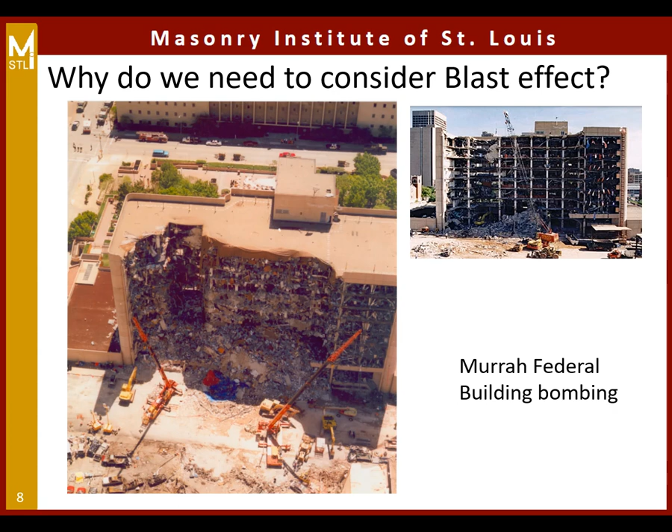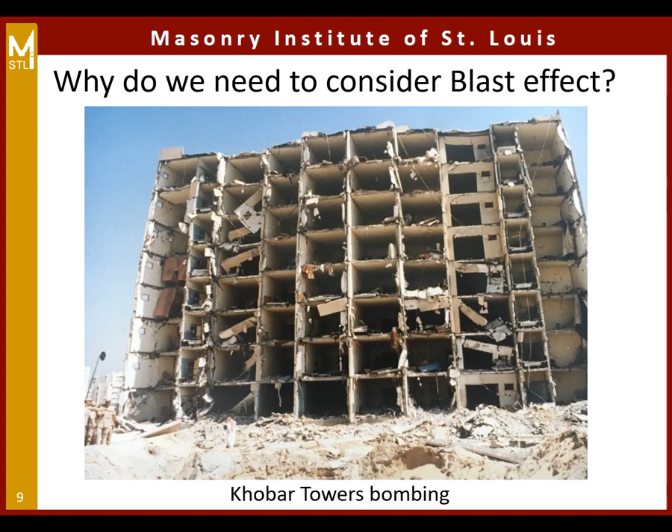It's unfortunate that it took lives, and about 19 American airmen were killed in this event, and almost 500 people were injured and wounded, mostly foreign nationals and Saudis. So those events, even though there were other events around the world targeting US territories and facilities, the federal government started to take a dive on the requirements that we currently have or what we had at that time.

Basically, what this new directive did is it established new policies, responsibilities for military construction programs. We're just going to call them MILCON for the sake of this presentation. And it delegated statutory authorities and responsibilities related to MILCON. It reissued, renamed the previous directive that became obsolete, and it consolidated information previously contained in other directives.

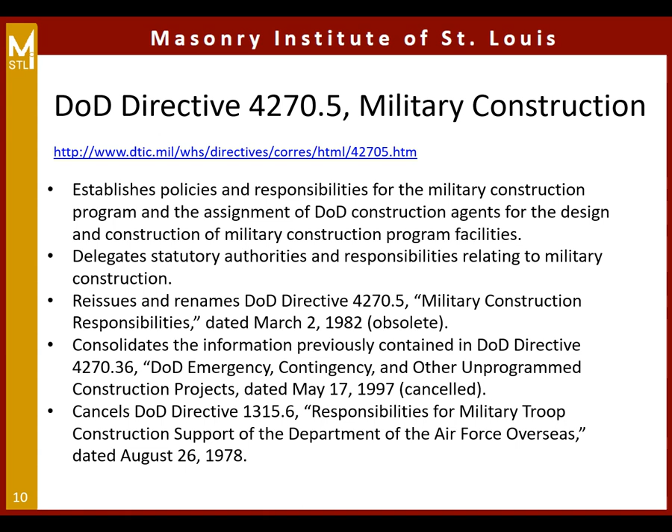And it canceled the 1315.6 directive. You can see that those previous directives, some of them are for like the Air Force overseas and for DoD emergency contingency and other unprogrammed items. So they tried to combine all of those things and make it more clear on the new requirements that we need to design for. Again, this is something that the DoD started to focus on after those frequent bombing incidents targeting US territories and facilities around the world.

The Unified Facilities Criteria, what you see here on the screen, we call them the UFCs. This reference came about after the DoD effort and the Directive 4270.5. This is the DoD minimum anti-terrorism standard for buildings. The UFCs are prescribed by MIL standard 3007. They provide planning, design, construction, sustainment, restoration, modernization, anything that is applicable to the military departments, defense agencies, DoD field activities. All of these will be in accordance with DoD Directive 4270.5 military construction.

There is a website on the screen. This is the WBDG website. If you go under that website, you can download all of the UFCs. There are multiple of them, and we pretty much have a UFC for everything related to design and construction for military construction. So you need to be familiar with it if you are doing federal and government projects.

The preparing authority for the publications, the UFCs, is the U.S. Army Corps of Engineers. They are the preparing activity, of which I work for one of their districts. There are multiple districts for the U.S. Army Corps of Engineers. I work for the Kansas City District. The Naval Facility Engineering Command is another preparing authority, NAVFAC, and AFCEC, the Air Force Civil Engineer Center. All three agencies jointly come up with all of the updates to the UFCs.

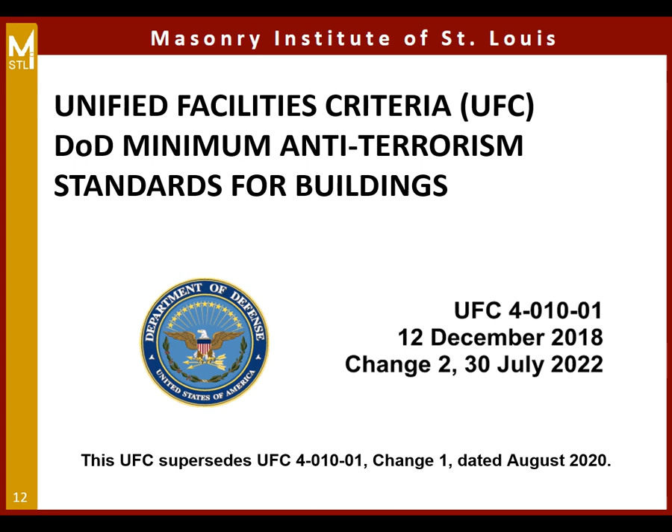When you go into the UFCs, you're going to see that the change number is actually noted, so it's easier to track what changes took place. So you'll see a forward slash and then the number 1, that's change 1, or a forward slash with the number 2, that's change 2. So we're constantly changing, revising, implementing new information into the standards.

The UFCs are effective upon issuance, so you're not necessarily going to get a notice, but once they are issued and posted on the Whole Building Design Guide website, they are enforceable. Now, I call them codes because your structural engineer will probably have to list the number of codes that he's using for the building design.

So question, how many architects in-house? Can you raise your hand? Okay, good, because this is an architectural series seminar.

So we're not going to focus much on the math behind the blast, but again, this is an overview of all of the requirements that came out of that directive 4270.5 and the DoD Minimum Anti-Terrorism Standard for buildings.

The UFCs will be used for all DoD projects, and they work for other customers where appropriate. That includes all construction outside of the United States as well. So Change 2 for the UFC added the United States and its territories and possessions.

Now, there are other publications that govern the design if you're doing OCONUS projects. OCONUS is outside the continental United States. That could be the Status of Forces Agreement (SOFA), the Host Nation Funded Construction Agreement (HNFA), and in some instances a Bilateral Infrastructure Agreement (BIA). So you're going to have to be in compliance with all four references - the UFC, the SOFA, the HNFA, and the BIA - if you're doing work outside of the continental United States.

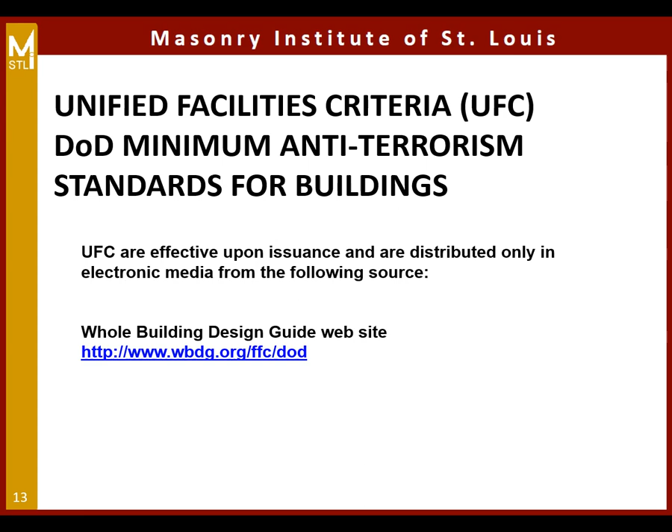So back to the Khobar bombing that I showed you in the second picture in Saudi Arabia. One of the findings in 1996 - and that took place in 1996 - in the Downing Commission report on the Khobar Towers bombing in Saudi Arabia, was that there were no standards for force protection in fixed DoD facilities, meaning we didn't really have a baseline to design and be uniform from a force protection standpoint. So the initial version of the DoD Minimum Anti-Terrorism Standard was published as an interim in 1999.

Keep in mind the three major incidents: the 1993 World Trade Center bombing, the 1995 Oklahoma City Federal Building bombing, and the Khobar Towers in 1996. It took 3 years to issue an interim version in 1999, and we finally enforced it as law in 2002. Fiscal year 2002 programs were all abiding by the DoD Minimum Anti-Terrorism Standards for Buildings.

Now, why we do what we do - it's a little different than commercial work. When you're designing a building in the private sector or commercial, you're conscious about the cost. Economy is a big deal - the budget, the construction cost. But what this standard is doing is trying to establish a minimum engineering standard that incorporates anti-terrorism based mitigating measures with no identified threat.

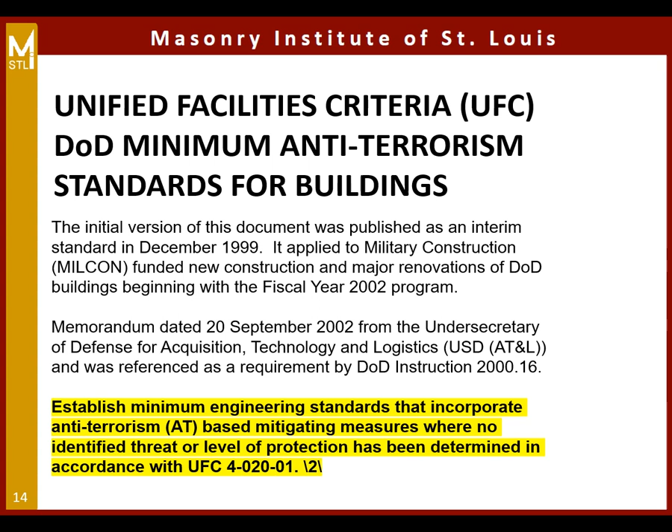Again, the intent of those standards is to reduce collateral damage - and we've seen a lot of those in recent years - and also reduce the scope and severity of mass casualties in the event of a terrorist attack. If you apply those standards, you will probably provide a cost-effective, implementable, and enforceable construction standard to protect personnel against terrorist attack.

Now, this is not like an open checkbook - the DoD doesn't have an open checkbook. We understand that complete protection against all potential threats for every inhabited building - and there are a lot of buildings owned by the Department of Defense - is cost prohibitive. But the intent of those standards can be achieved through prudent master planning.

So we can apply a few things as we're designing our facilities: master planning, real estate acquisition, and design and construction practices.

Now there is an exemption in the standard: standalone parking garages. A standalone parking garage is exempt from those standards. However, if you have a parking garage underneath an inhabited building with occupants above, the standard applies. If you have a parking garage on the rooftop of a building that is also inhabited, the standard will apply as well.

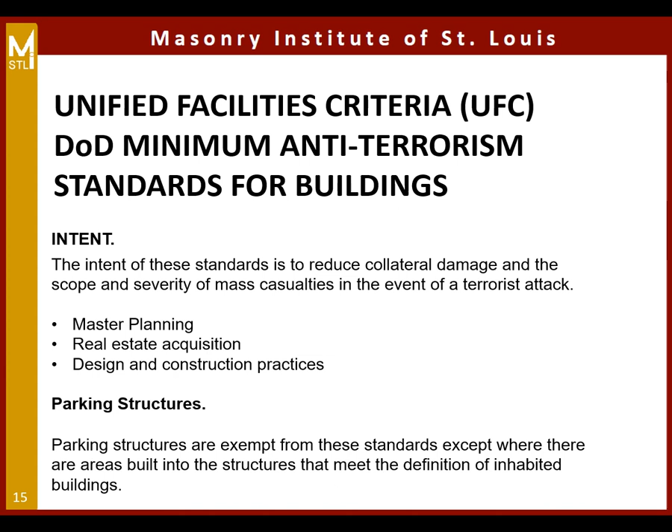If we look at the Security Engineering UFC, we look at two stages, so I'll move to this side so you guys don't feel left out. We have two phases: the planning phase and the design phase. This flow chart helps guide the designer.

First you have to define your design criteria using UFC 4020, the security engineering UFC. 4010, that we mentioned, is design for anti-terrorism. So you ask yourself: is only the DoD minimum standard required, yes or no? If yes, you apply your minimum anti-terrorism standard for buildings, 4010. If no, you go to the Facilities Planning Manual and UFC 42001, and abide by those design strategies. Either way, you incorporate your decision into your design strategies and planning documents.

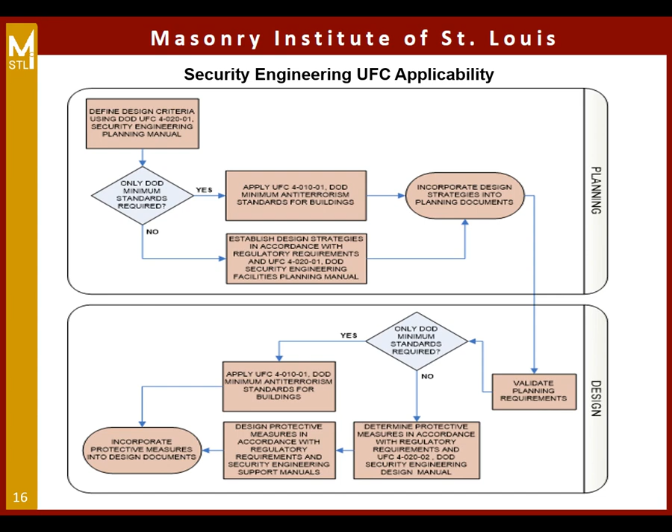Then you move down to the design phase. You validate all of your planning requirements and go through the same process flowchart: do I really need to consider minimum practice standard requirements, yes or no? Then you eventually incorporate the protective measures into your design. This is the initial way of knowing which path to take, and then you move into construction and so on.

If I take a snippet of what defines a level of protection, what does that mean to you as an architect? Comparing levels of protection, we start with below AT standards—AT meaning anti-terrorism. Below standards means you're doing nothing, not protecting anything, so you expect severe damage.

If I go all the way up to a high level of protection, let's look at the impact: the potential building damage performance category, the potential door and glazing hazard, and the potential injuries. For comparison, if I'm doing a very low level of protection, the building itself will experience heavy damage—probably structural collapse, though progressive collapse is unlikely. Space in and around the damaged areas will be unusable.

Let's look at glazing and doors. Glazing will fracture, come out of frame, and likely be propelled into the building, with potential to cause serious injuries. This is bad—this is not the intent of the standards. However, some facilities with low importance on an installation might fall under a low level of protection. Doors will become dislodged from the structure but will not create a flying debris hazard, for category 4 for example.

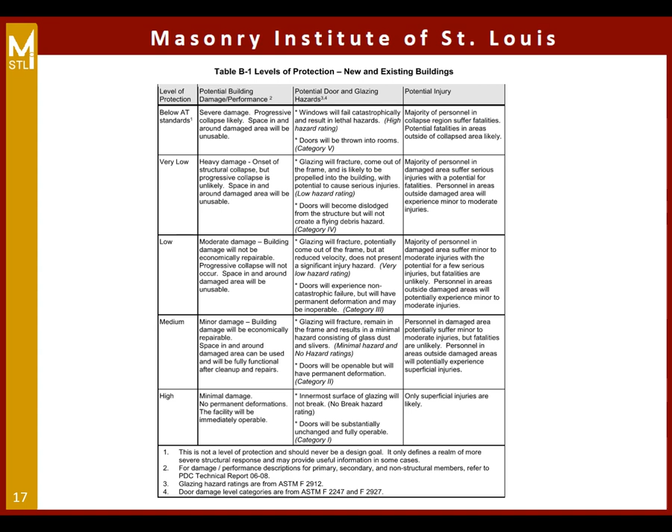Now, I'm not saying you're going to design for a high level of protection right away, because it might not be required by the agency you're working for, and it's going to cost a lot of money. So you do want to know exactly what level of protection you're designing for. The criteria, similar to tornado or earthquake impact on structure and occupants, for glazing and doors come out of ASTM F2912, 2247, and 2927, which are listed here on the screen.

So back to the philosophy—those protective measures are engineering solutions. To do what? To lessen the risk of mass casualties and collateral damage resulting from a terrorist attack. Let's not forget the intent and focus of those standards: we're trying to lessen the risk of mass casualties and collateral damage.

The implementation of the standards, as we found in recent applications, will provide some protection against a wide range of threats. Again, we can't read the minds of terrorists—we don't know how much explosive they're going to use. But those standards cover a wide range of threats, and if you were to apply them, most likely they will save lives.

Obviously, cost aside, human life is the most valuable thing when we design from an architectural and engineering standpoint—it's all about life safety. Cost here is not necessarily the issue. As long as you define the level of threat, you have to apply all of the standards to it.

There are two key elements to consider: time and design practices. Time means you have to put these standards in place ahead of the terrorist attack, otherwise you defeat the purpose. You apply it during design and construction—you need to be one step ahead.

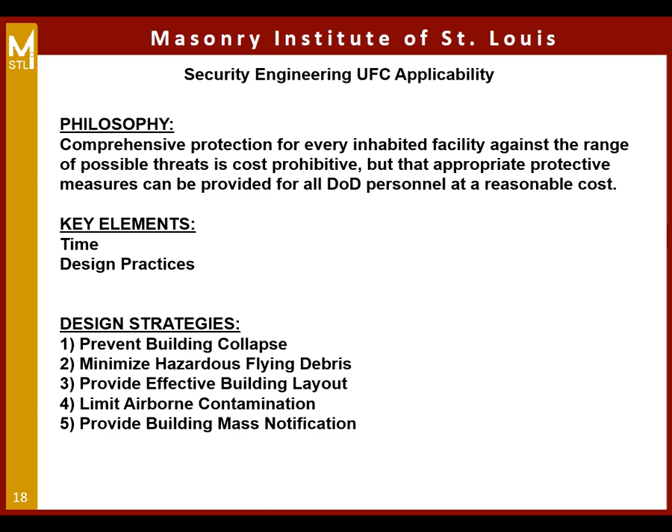All right, standard 4-010-01 talks about standoff distances. The standoff distance is prescribed in the standard, and I'll explain this a little bit. The heavy shaded square here is your inhabited building—that's your structure. What's around it is what we call the unobstructed space.

We need to maintain a minimum of 33 feet of unobstructed space. If this was on an installation, here's the installation perimeter as a phantom dark line. The zone between the unobstructed space and the installation perimeter we call the inner clear zone, and there's an outer clear zone if you have a perimeter as well. The standard says I need 20 feet minimum standoff distance between the installation perimeter and the unobstructed space, and I need to maintain a minimum aggregate distance of 50 feet to the outer clear zone.

So what does this leave us? 50 minus 20 is 30 feet. What if I only have 20 feet in the outer clear zone? What am I going to do? I can't maintain the 20 feet minimum standoff distance, because the aggregate has to be 50 feet. That means your planning has to change—that 20 feet has to become 30 feet, which pushes your building further south, which isn't what you were planning for. So now you have to reconsider the planning.

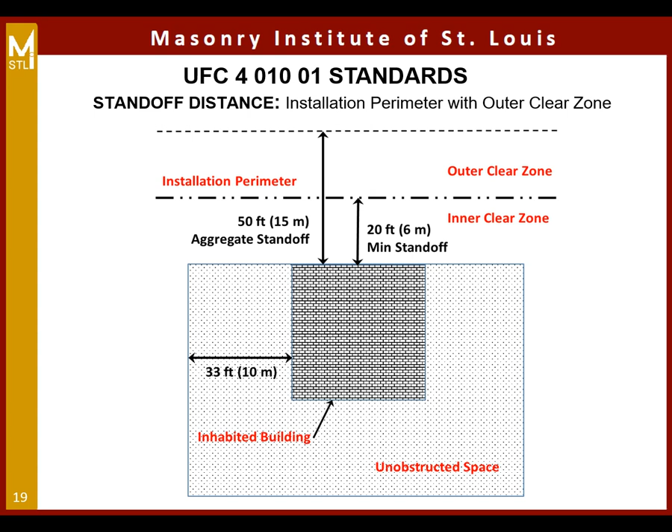Here's an example of standoff distance with an installation perimeter but no outer clear zone at all. You still need to maintain 50 feet minimum standoff distance, with 33 feet around the building as the unobstructed space.

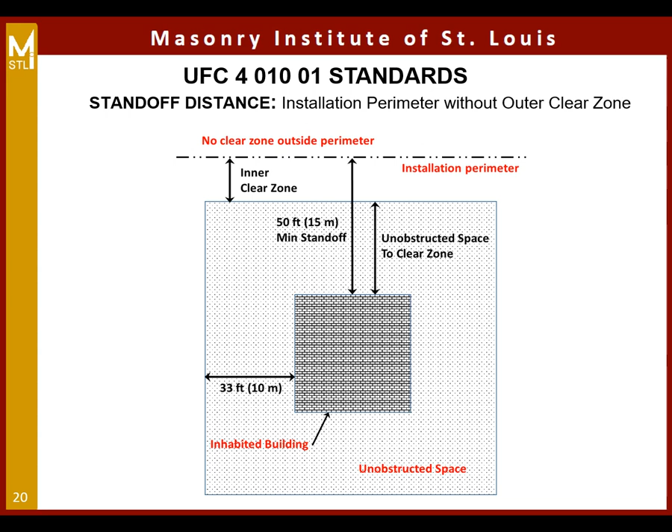There is no definition of this distance in the inner clear zone, but under no circumstance can it be less than 50 feet minimum standoff distance. So you can see that the position of the building itself might affect everything else you're doing around the building.

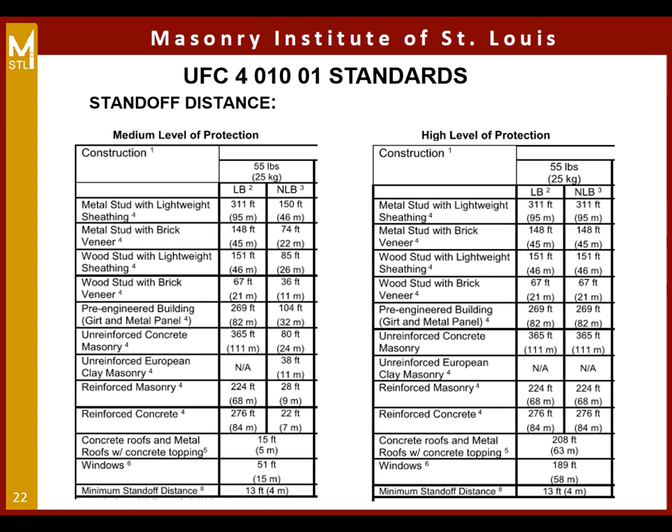Now, on a side note, you don't need to probe into the design parameter for the explosive—how many pounds of TNT. You don't need to know. So there is a need-to-know basis. There are certain elements of the design team that will have access to this, and they will do the analysis. So if you don't need to know, don't ask the question. And you have to have certain clearances too. If you don't have top secret clearance, you're not going to be able to find this information.

The standard addresses a few elements aside from what we discussed already—concealment, trash containers, electrical, mechanical equipment. So every aspect of your project has a reference in the standard, and you have to be familiar with it.

Walls and screens, enclosures, parking within unobstructed spaces. You can actually have parking in an unobstructed space for as long as the explosive device can be seen by someone, okay? So you have to plan your parking for that.

Adjacent existing buildings—let's say you're putting a new facility next to an existing facility that doesn't have to abide by those standards—you still have to maintain the 33 feet minimum unobstructed space, which means you might modify the existing parking lot, or if they have a trash enclosure, you're going to have to remove it. There are certain things you still have to maintain.

The standards dropped off the drive-up, drop-off areas—those were canceled out of the new standard, and access roads were also deleted.

Parking beneath buildings or rooftops—we kind of touched on this. If you don't need to put parking underneath buildings, don't do it. If you have to put buildings or cars parked on a rooftop, we have to apply what we call ACP design, access control points, where you're actually searching people coming in, making sure everybody's authorized to be on the installation. So we can do certain measures, but parking underneath buildings is not necessarily the first choice when it comes to those standards.

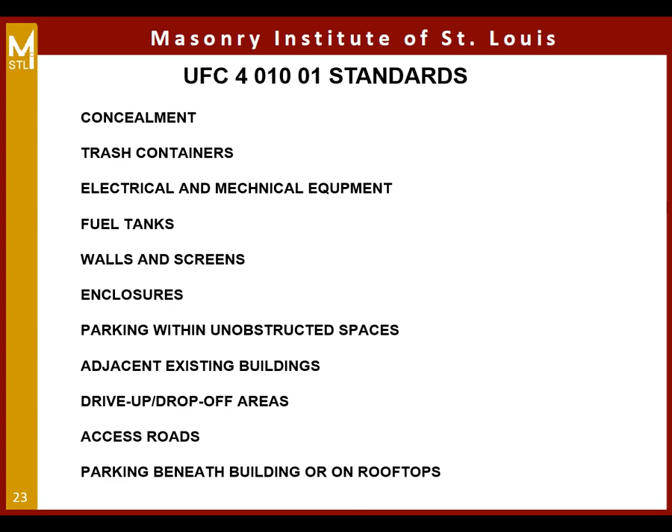I want to show you a couple videos of a simulation. This is a 3D finite element analysis, just from a visual standpoint, of a progressive collapse resistance simulation. The progressive collapse publication itself is UFC 4-023-03. Let's see if this video will play for you.

This first image here is basically a blast impact on a single column simulation.

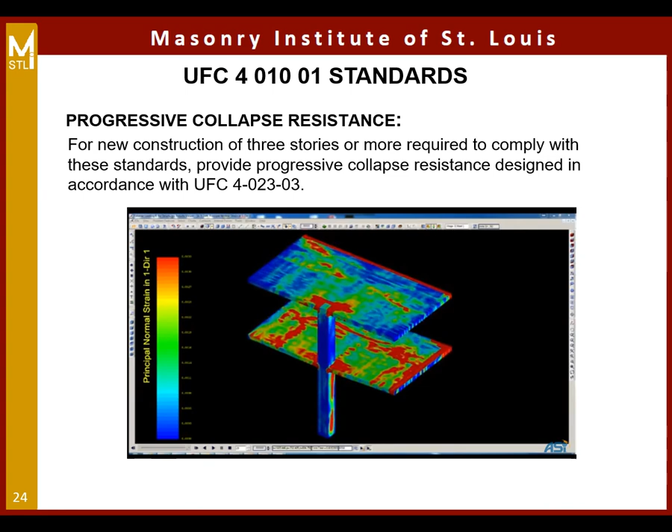It's going to play another video, non-related. This is actually from the Navy, so don't pay attention to this.

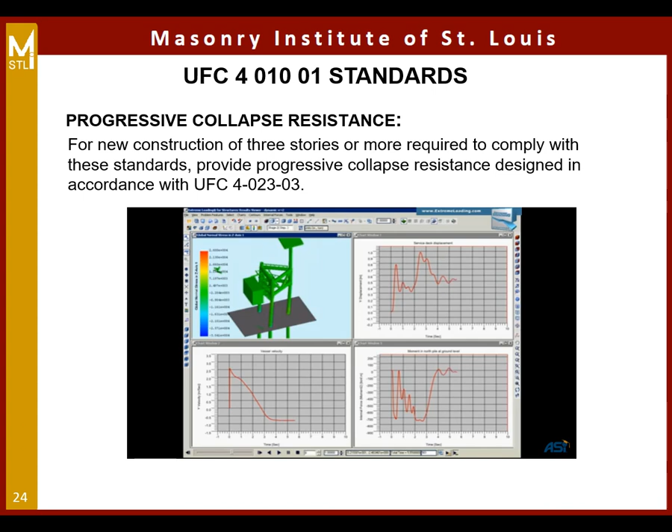I want to show you the next simulation for progressive collapse. Are you guys enjoying this so far? Show of hands. All right, there you go.

So this is a 3D simulation of progressive collapse on the side of a building here due to an explosion, for example. Here's another example.

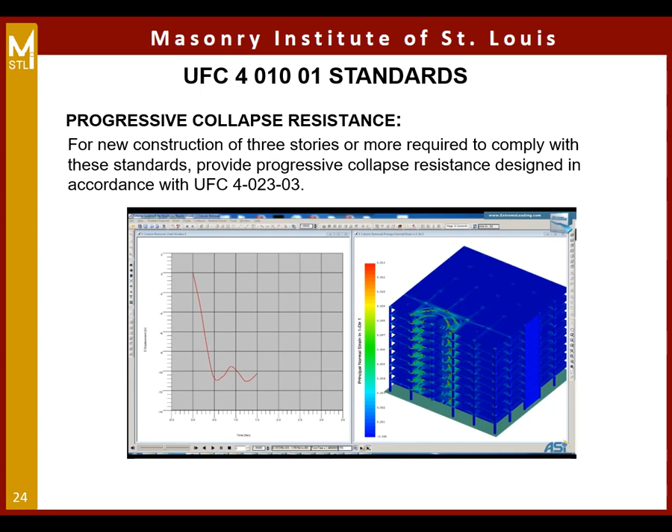Your expert in protective design engineering, he's going to be a sub-consultant. He's going to be doing all this stuff and advise the design team of what needs to happen.

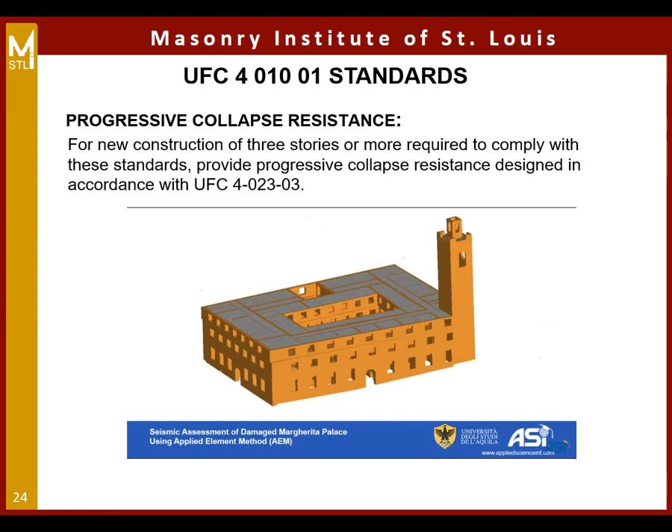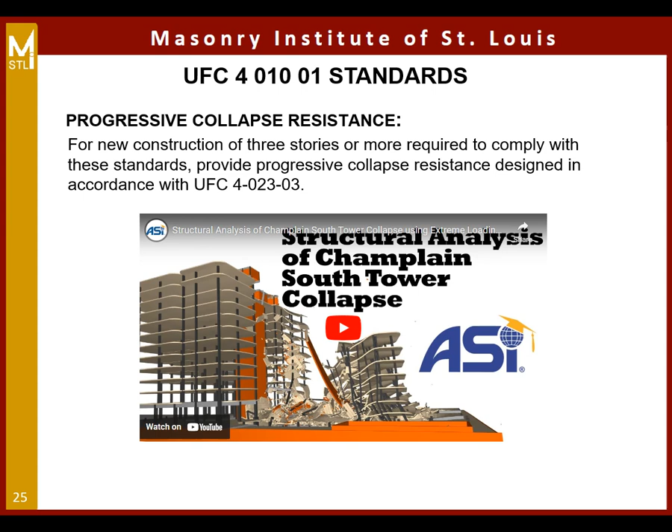Let me show you another one, might be very recent to you guys. This was the Champlain South Tower collapse in South Florida. This is not necessarily a terrorist attack impact, but I wanted to show you the simulation of progressive collapse modeling in a finite element analysis model.

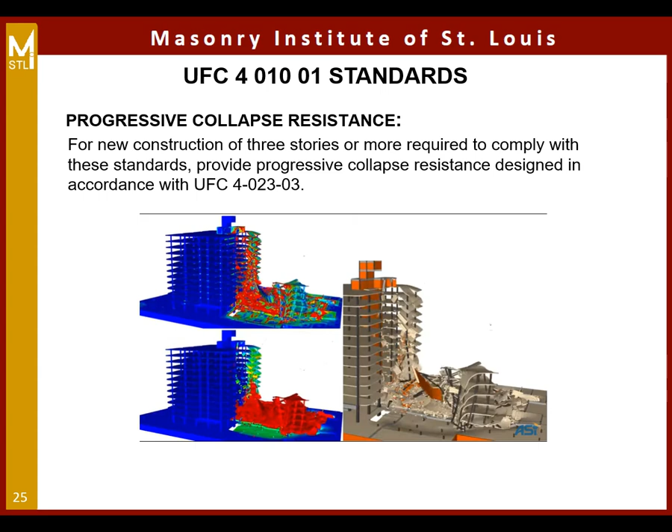This one has sound to it, so that's good. So that's what we're trying to prevent, okay? The standards has provisions for how we bridge a missing column after a blast event. Here's another image of a collapse that we're trying to prevent, right?

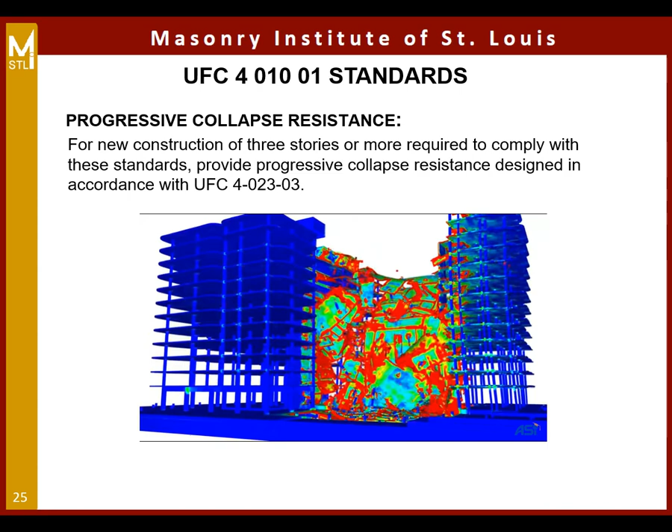All right, I think you guys got the idea. All right, so let's talk about masonry. So standard 9, exterior masonry walls, all right?

So we talked about unreinforced masonry walls that are not very good in those applications. They are actually prohibited for the exterior walls of new construction that requires compliance with the standards. The masonry walls, exterior walls, must have vertical and horizontal reinforcement distributed throughout the wall section.

There is a prescribed percentage for reinforcement. So vertical needs to be at least 0.05%. Spacing is 48 inches on center. And you need to have reinforcing within 1.3 feet of the ends of the walls.

Now, why don't we just say 16 inches on center? Why is it 1.3 feet? Because it's a conversion of 410 millimeters. The federal government uses metric for all other things, right? So 1.3 feet is 16 inches on center. So you have to have that.

For horizontal reinforcement ratio, it must be at least 0.025%. You can put joint reinforcement no more than 16 inches on center. You can do a bond beam with reinforcement no more than 4 feet, 48 inches on center, again with reinforcement at 16 inches from the top and bottom of the walls.

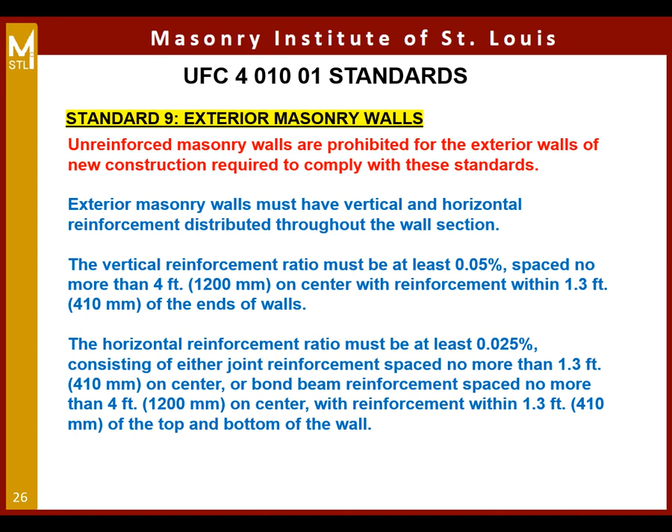If I look at the conventional construction parameters, quick comparison here, table C-5, between reinforced masonry and unreinforced. You're going to need to use blocks 8 inches to 12 inches versus 6 to 12 for unreinforced, obviously, because I can't double reinforce a 6-inch block. More often when you detail these walls, you're going to end up with double reinforced masonry. It's near hard, not impossible, to put it on a 6-inch wall.

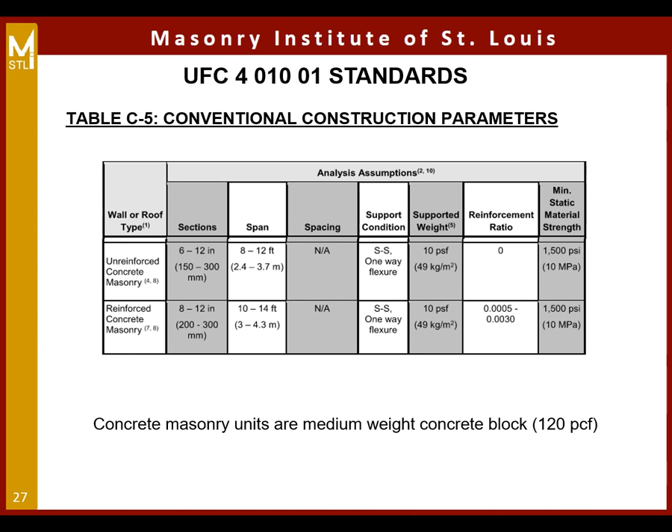The parameter here is one-way flexure. SS here means simple span. The supported weight is 10 PSF. This weight is not the self-weight of the masonry; this is weight that is attached to the masonry wall. And the minimum block is 1,500 PSI. I think now, by default, we'll get 1,900, 2,000, or 2,500, so it's not going to be an issue for you. And the minimum density is 120 PCF, which is medium weight concrete.

So we're trying to take protective measures against this instance by having different layers of protection. You might have a bollard system or things like that ahead of where vehicles would be parked in front of the building.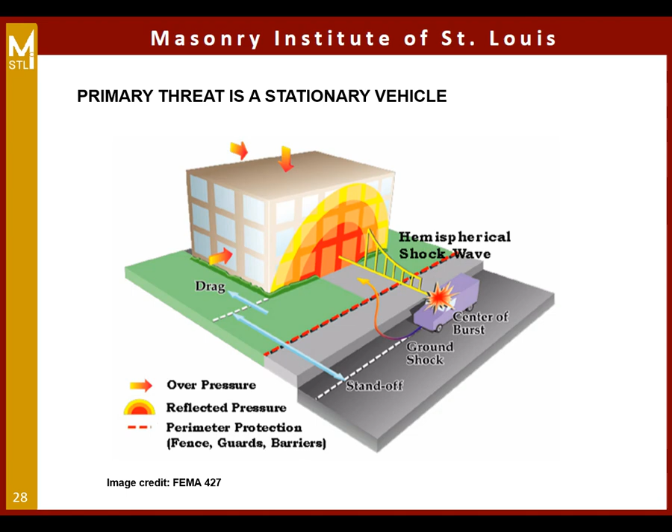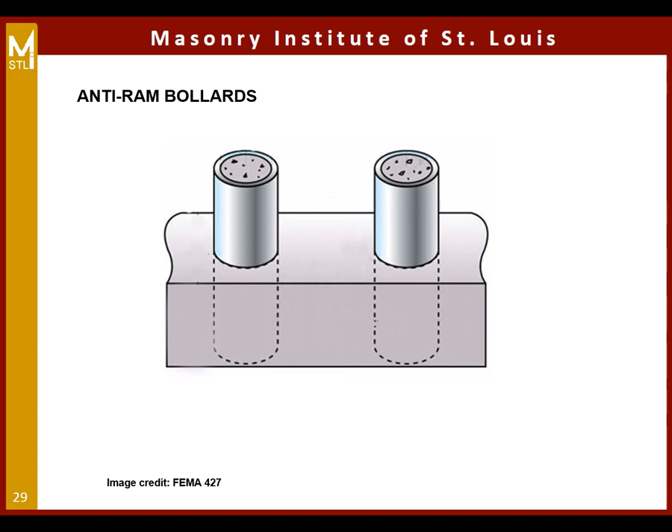One way to do that is to use pre-tested bollard systems. Those are DoD approved and tested details that you can go find and use. This is an anti-ram bollard system to protect against moving vehicle attacks. There is certain criteria for how many miles per hour you consider for design. If you're parked parallel to a building, that's 30 miles an hour. If you're at the intersection or corner of a building, it's 50 miles per hour for velocity, and obviously the car weight will be different.

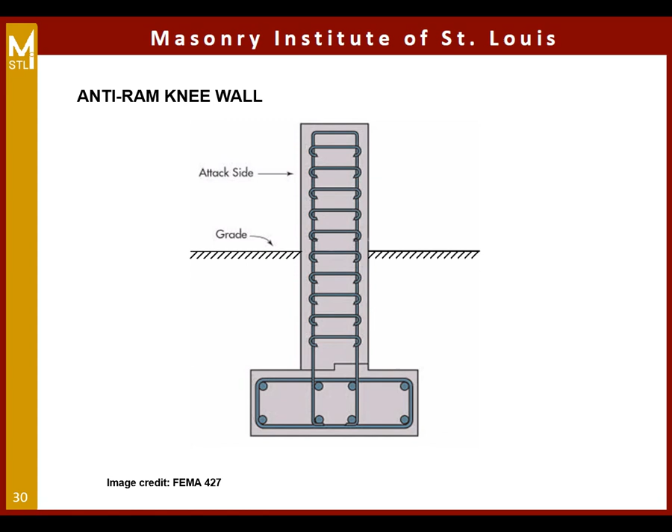Another type is the anti-ram knee wall. This is a significant concrete barrier wall. It could go up to 24 inches thick with heavy reinforcement in there. So those are details that you can find and use. This is out of FEMA 427.

A secondary threat sometimes considered is a hand-carried weapon placed directly against the exterior envelope. This can be carried in a briefcase, backpack, or any sort of thing like that. Now, if you have pre-screening to the installation, you can detect those. But if not, here you can see the impact or the difference if you were to use 500-pound TNT versus 5,000-pound TNT, for example. Your pressure goes up from 1,600 to almost 4,000.

This is the incident pressure plot against the range in terms of PSI. What's good about this, if there is anything good about this, is that the wave pressure actually decays very quickly, versus earthquake, which is more cyclic.

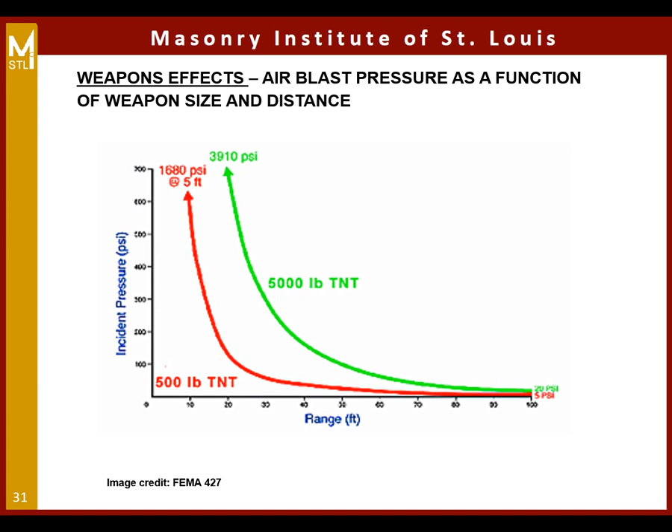All right, explosive pressures. Let's talk about that for a second. They are typically much greater than other loads. Again, fortunately, they decay extremely rapidly. For blast-resistant design, the most significant feature of an explosion is a sudden release of energy to the atmosphere.

It's a release of energy above the atmospheric condition, and that's what causes the most destruction. Let me explain this graph real quick. There's an explosion device, they set it off, and it causes a peak incident pressure, which is above atmospheric pressure, and it tries to die off very quickly. However, when it hits the building, it actually amplifies. We call this the peak reflected pressure. It reflects with a reflection factor C sub R, R for reflection, and it almost doubles.

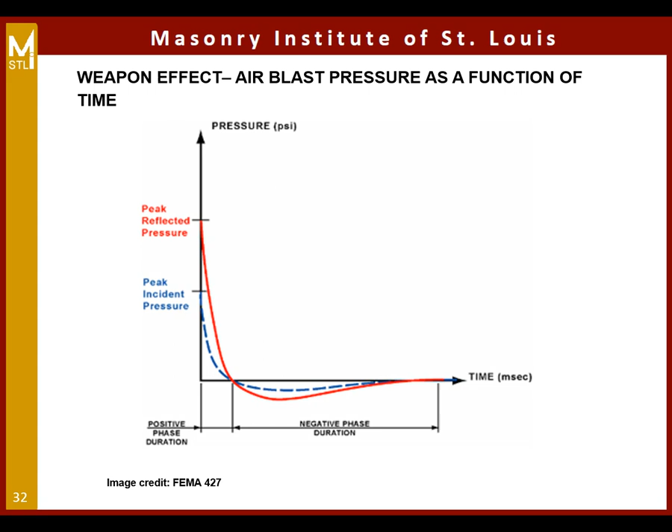So we get an amplified peak reflected pressure, and then the reversal between positive phase duration and negative is that rebound. That rebound from the pressure is not a reversal of load like seismic, for example. It's actually a rebound of the building walls that causes a negative pressure, and that's why in the graph we go below the atmospheric pressure line. So this is time versus peak pressure. I didn't plot it here, but there's an impulse curve as well. The impulse curve is the integration of those curves. If you take the area under the curve, that's the impulse pressure. You're going to hear that term quite a bit.

Let's look at the effect of shock wave expansion and engulfment of buildings. The first image here shows the blast wave breaks windows, exterior walls blown, columns may be damaged. Then the floors are actually moving upward, and we move into full engulfment. So you've got damage on all four sides, columns bowing in, floors losing columns, floors moving up, and so on and so forth.

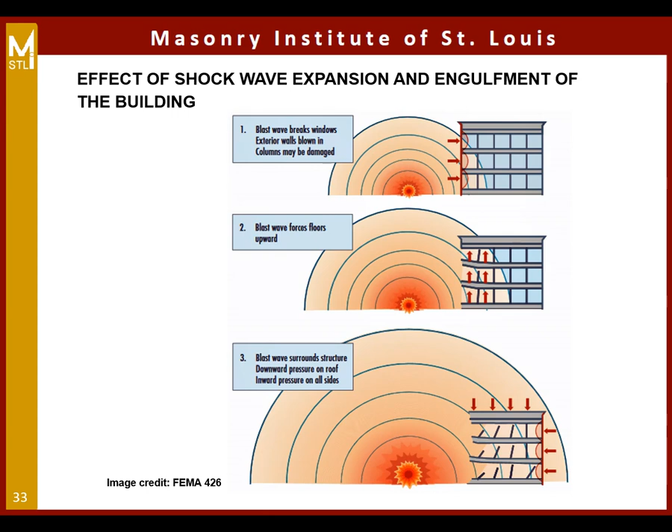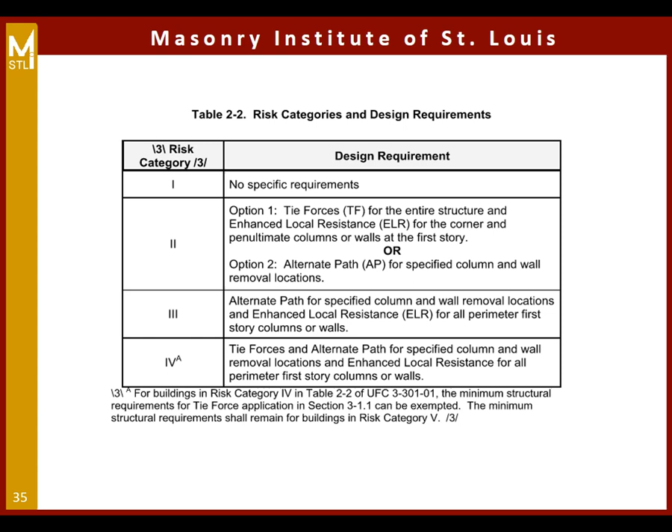Progressive collapse, let's touch on that real quick. Buildings are designed for progressive collapse. Obviously, risk category is key here, so you have to know which risk category you're designed for. Based on your risk category, you have options: you either do the tie force or the alternate path method, or both, or enhancement of local resistance. So it's very key to engage with your consultants ahead of time, because this makes a big difference in the design analysis.

What we're doing is we're tying the structure together. We don't need a weak link in our structure.

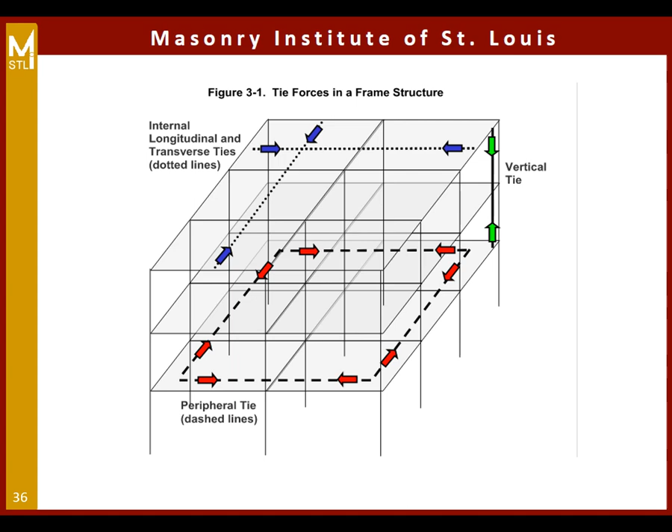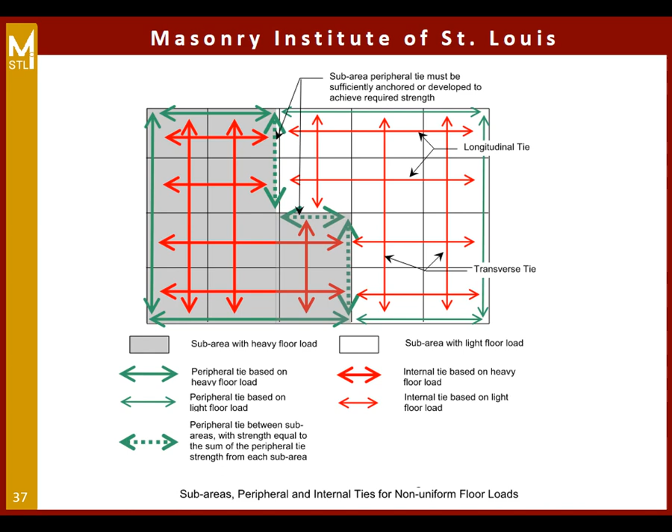Something interesting about the previous slide: this works great for uniform loaded floors, but more often your floor load is not the same. So you have to consider sub areas, and every sub area will also need to be designed for those internal ties and peripheral ties. When it comes to a heavy loaded zone, shaded here, and the lightly loaded floor areas, shown as dashed green lines, those peripheral ties and internal ties need to be designed for the sum of the forces from the lightly loaded and the heavily loaded areas.

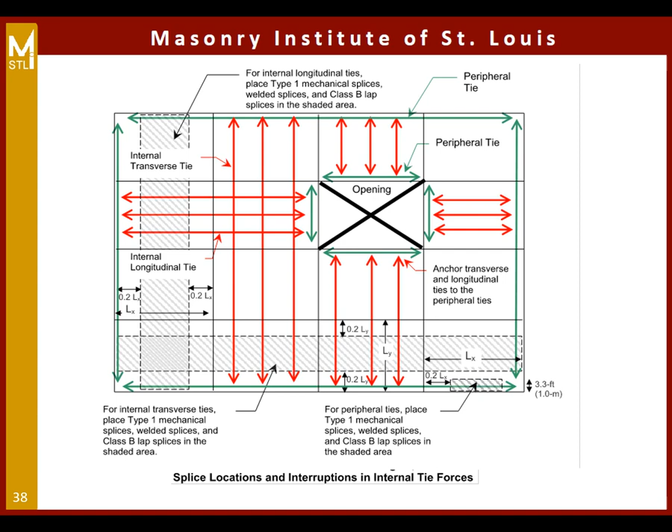Of course, every floor will have an opening, hopefully not from an ATFP standpoint, but it's inevitable that you have to have floor openings. So there are also criteria on how to anchor those ties together in your floor diaphragm design. There are certain zones that you can do mechanical splices, welded splices, and Class B lap splices. So it gets very intense in detailing when you consider the progressive collapse tie force method.

An example of what controls your design is noted in this table. The most important thing is your connection - you don't want your connection to fail. So the controlling load, whether it's deformation or force controlled, is your P, V, M. For architects, P is axial load, V is shear, and M is moments. So you have to consider the extreme loading controlling action for connections.

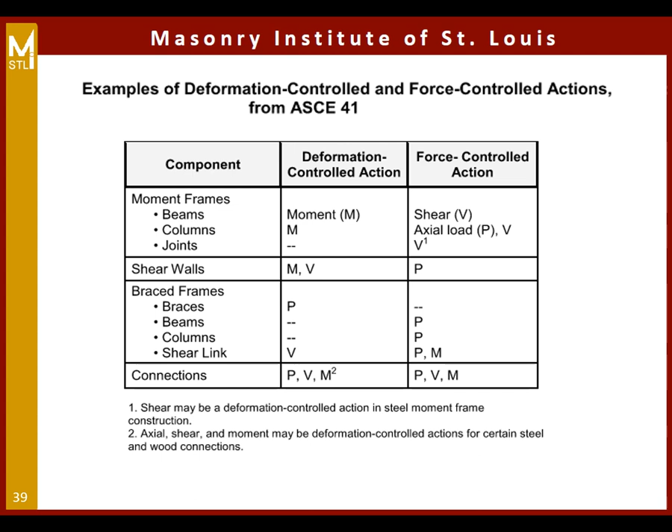Let's move on to the next method, which is the alternate path method. Let's say this is your building here, with 3 columns. I'm going to remove one of the columns from the analysis, and I want to make sure that the building doesn't collapse - I'm preventing progressive collapse from happening. What that means is if this bay is 30 feet long, I need this beam to actually span 60 feet in a catenary action. Now, if it spans 60 feet without collapsing, without losing capacity, you did your job. The building's not going to collapse.

Will it deflect 2 or 3 feet? Possibly. But what does that mean? I'm not comparing it to L over 360 or L over 240. I'm just trying to make sure that the building doesn't collapse and occupants have enough time to evacuate.

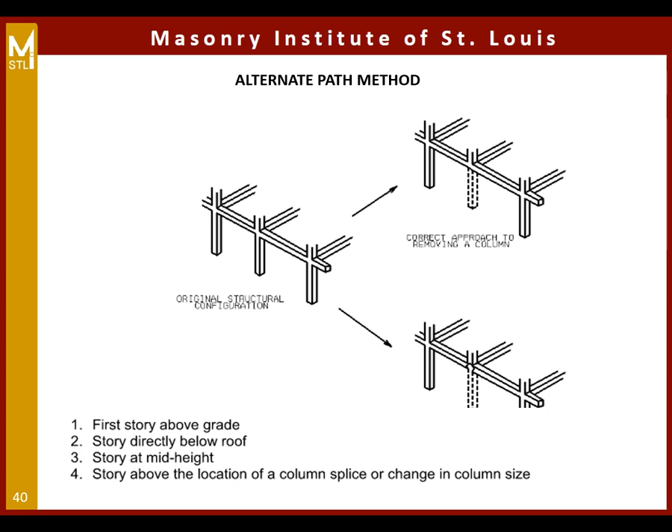Here's an equation for increased gravity load - I'll leave that for the engineer series. We get some of these factors when we do the alternate path method. There is an amplification factor called omega, and whether you do linear static analysis, the upper table, versus dynamic nonlinear, the omega factor changes. So if we look at masonry, for example, load bearing, you're amplifying the load combination by 2 - so you're doubling the loads.

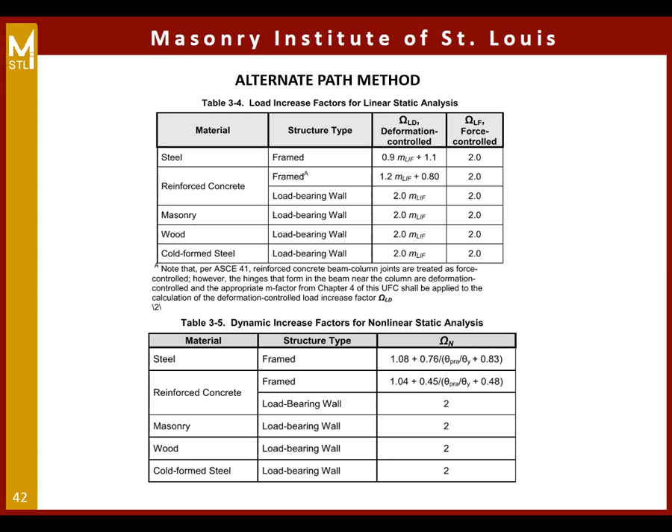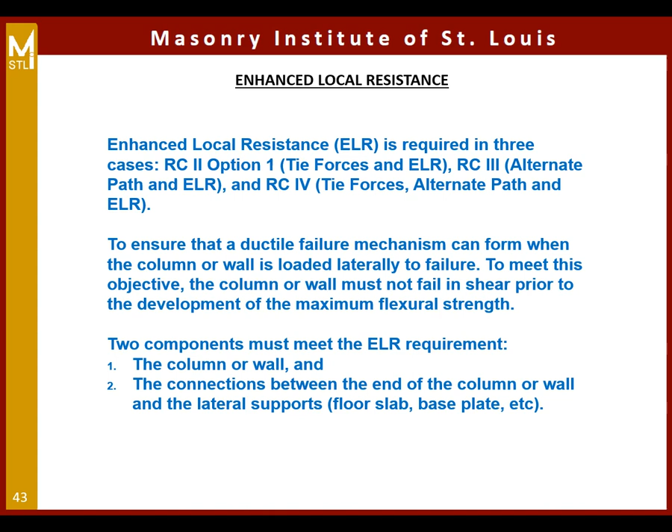Enhanced local resistance - this is the third level of consideration next to the tie force and alternate path methods. What we want to do is make sure that the two components meet the ELR requirement: your columns or walls, and the connections between the ends of the walls to the lateral support, which is your floor slab or base plate.

If I focus on chapter 6, that's your masonry chapter - it provides specific requirements for design of masonry buildings to resist progressive collapse. There's a lot of conditions related to material properties, overstrength factor. You're going to have to start using ASCE 41 - that's another publication that structural engineers would be using. There's also a reduction factor, phi, for masonry.

Components have to be capable of carrying the load. So the takeaway of this is the rotation capacity - the 0.2 radian, which is 11.3 degrees - that's what we're trying to achieve. If I can get capacity with a rotation of 0.2 radian or less, then I meet the standards. If you exceed it, it's trial and error - you have to redesign the element.

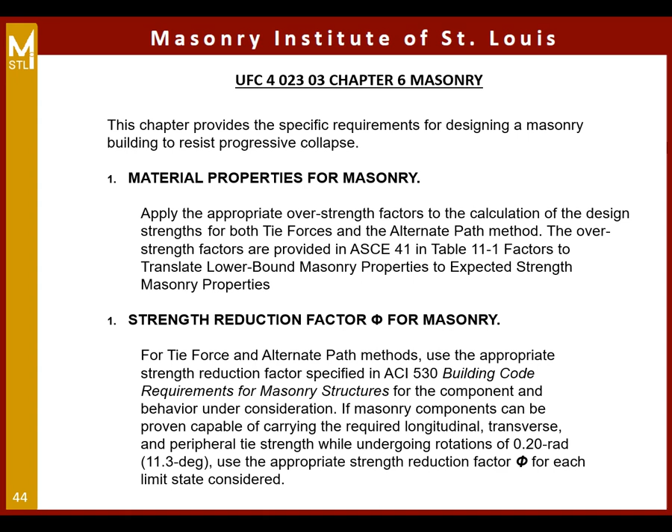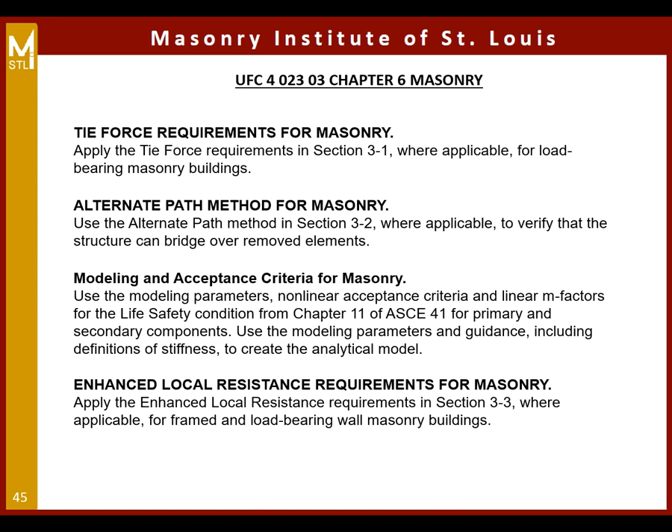Tie force method requirement is also applicable to masonry. Alternate path method for masonry is also applicable. Modeling and acceptance criteria - this is in chapter 11 of ASCE 41. And enhanced local resistance requirement for masonry - you also have to apply it according to section 3.3 for load-bearing masonry wall buildings. Let's look at detailing here.

If you go to the ncma.org website, you're going to find a lot of information. This is TEK 14-21A, shear response modes for masonry walls - basically how do they fail. We either fail them in direct shear, so the wall literally breaks in a horizontal fashion, or in diagonal shear, which shows a diagonal break. Those are the two modes of failure.

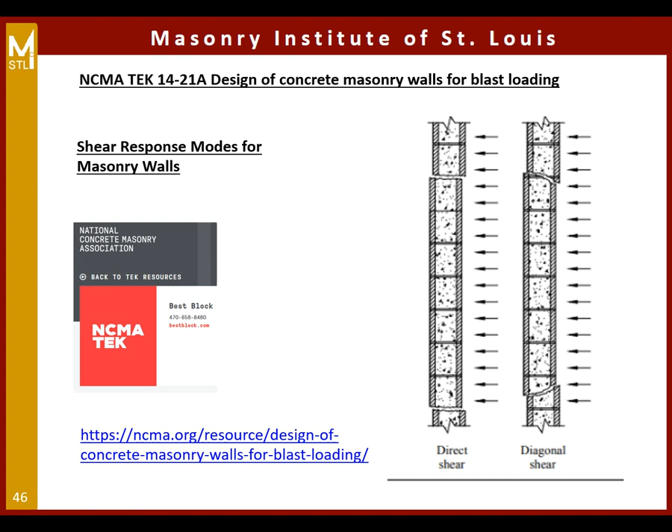From a detailing standpoint, looking at this plan view of a masonry wall, the standard will require you to fully grout your wall. A partially grouted wall isn't good enough based on the testing we've done, because that also creates flying debris in the ungrouted cells. So you have to fully grout, whether you have bars in every cell or not, and the standard will most likely require a stirrup - that horizontal tie.

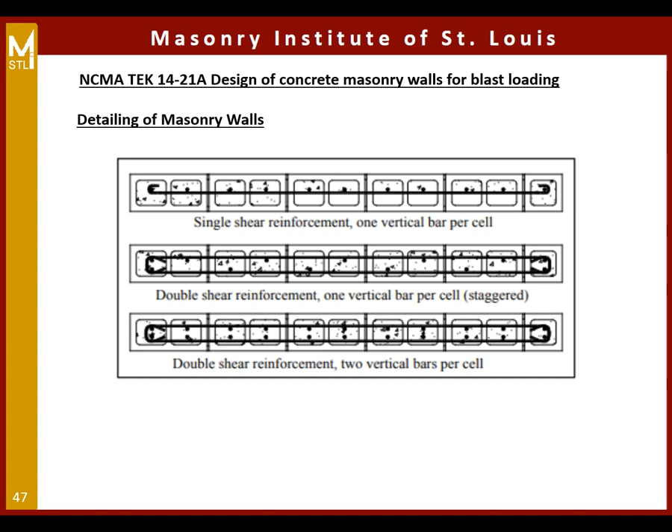You could also have a doubly reinforced layout with staggered bars - one here and one here - with one vertical bar and a closed tie. Or you can literally put 2 bars in every cell with a closed tie. Now you know why most likely you're going to end up with a 12-inch block wall, or an 8-inch could do the job, and certainly not a 6-inch block.

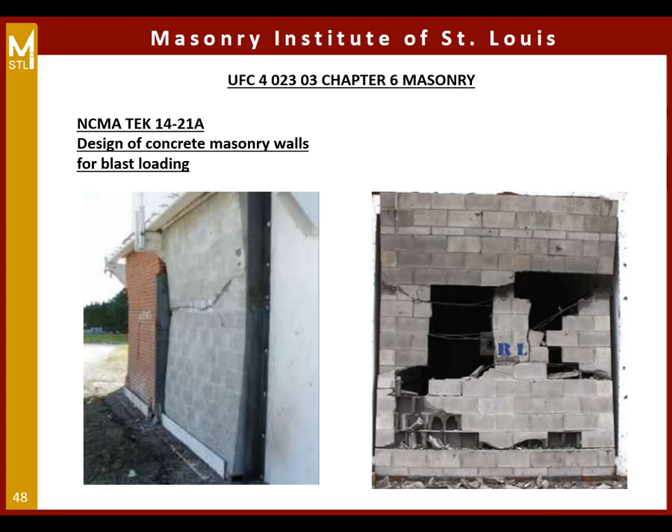Based on testing, we tested two walls - unreinforced with joint reinforcement, and reinforced masonry walls - and you can see the difference. The unreinforced masonry walls are very brittle, there's no ductility, and they fail terribly, miserably. They are prohibited in use. Reinforcement certainly does the job - it still fails, whether horizontal or diagonal shear, but the takeaway of today is: reinforce your masonry walls. Don't use unreinforced masonry.

Some of the design and construction challenges outside of the masonry world are doors. From a life safety standpoint, which direction do we want doors to swing, in or out? We want doors to swing out from a blast standpoint too - we don't want doors swinging in because that becomes flying debris. Some doors might swing in, in office buildings - if you're in an office space, that door swings in, and that's flying debris. You ultimately want outward swinging doors, but it's hard to achieve.

So we have some issues in the industry to solve, through door hardware, latching devices, and masonry blast walls. They have to be 8 or 12-inch block, fully grouted. Penetrations on those walls are very challenging - you can't have too many penetrations through a masonry wall based on those standards. There's a strong difference between blast requirements and ballistic requirements, and that's a whole different topic for another day.

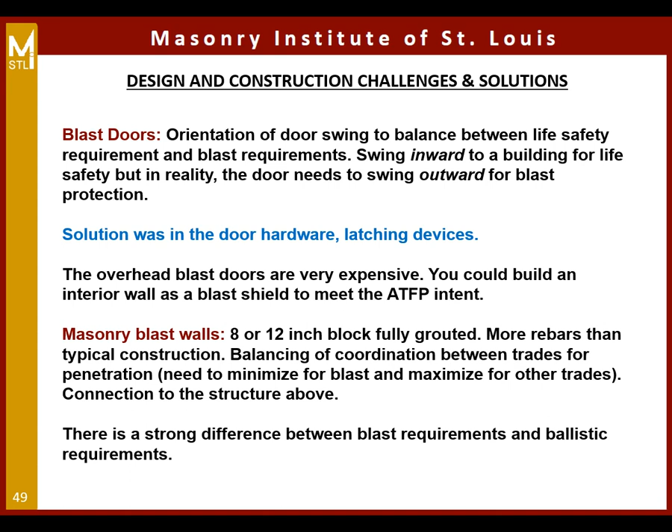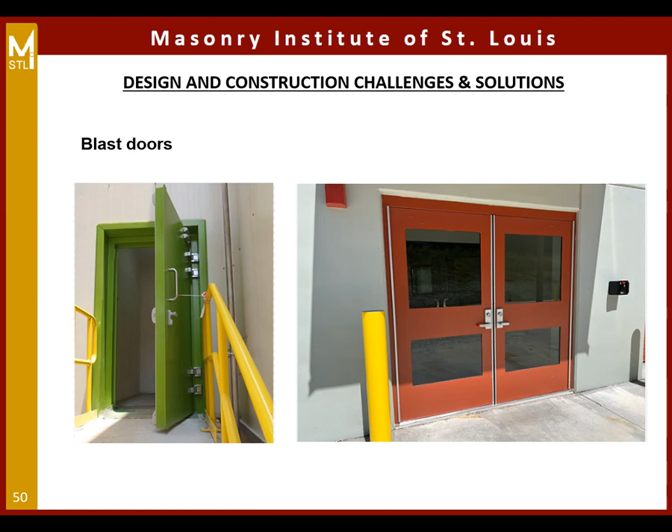Here's an image of what a blast door looks like. This is definitely not your hollow metal door - not something you buy from Home Depot. Here's a double door blast door. So there are things you need to start to probe into if you're getting yourself into projects like this.

I wanted to show a comparison between a blast load and a seismic load. Explosions are single high pressure impulses that act over milliseconds. Seismic loads are vibrational, acting over seconds. Blast is directly on the exterior envelope, while seismic is at the base of the building and so on. The most significant difference is that mass actually helps resist blast loads, versus it works against you in seismic design.

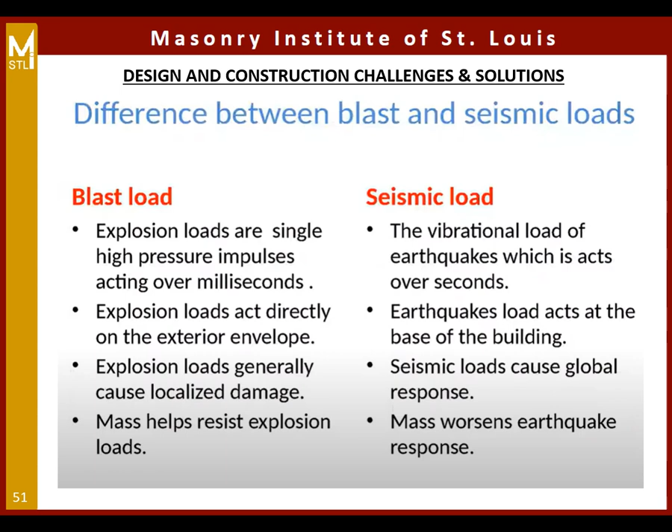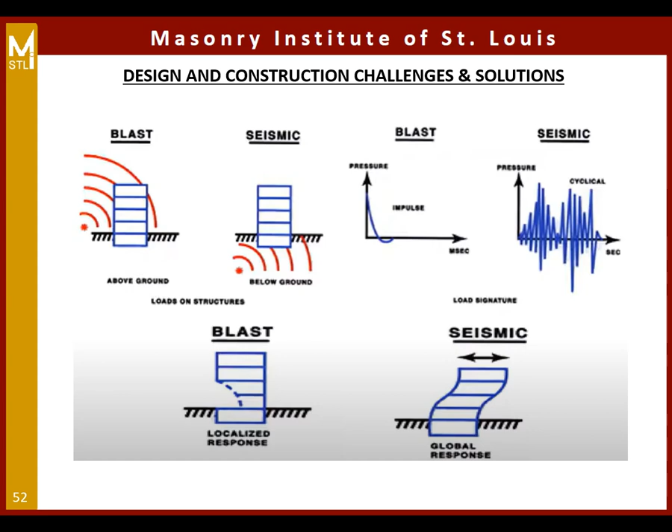Some of the differences - I'm sure there are more, but those are the ones I wanted to share. Another image here, just visually: a blast event engulfs the whole building, while seismic is really ground motion below grade. The blast impulse decays very quickly versus cyclical load from a seismic standpoint. A blast event might take out a good portion of the building, like the Oklahoma City bombing, whereas seismic is really a global performance of the entire building, shaking back and forth.

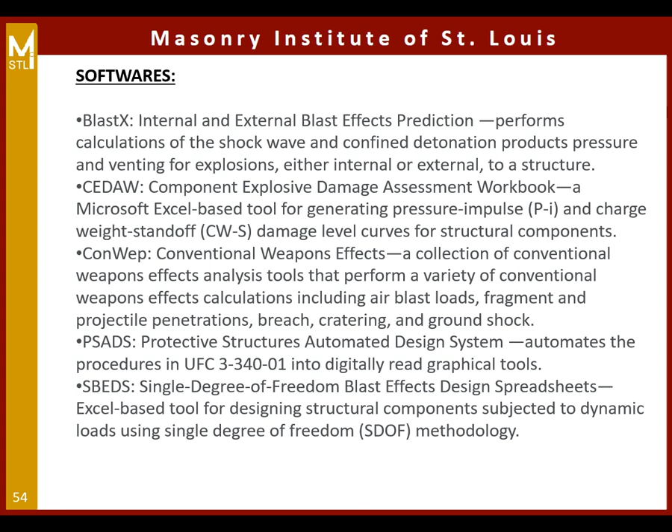There are some commercial softwares out there, like SBEDS and BlastX and others, that do blast effect predictions and performance of structures, that your consultant will probably be doing. Again, it's on a need-to-know basis - if you don't need to know, don't ask the question.